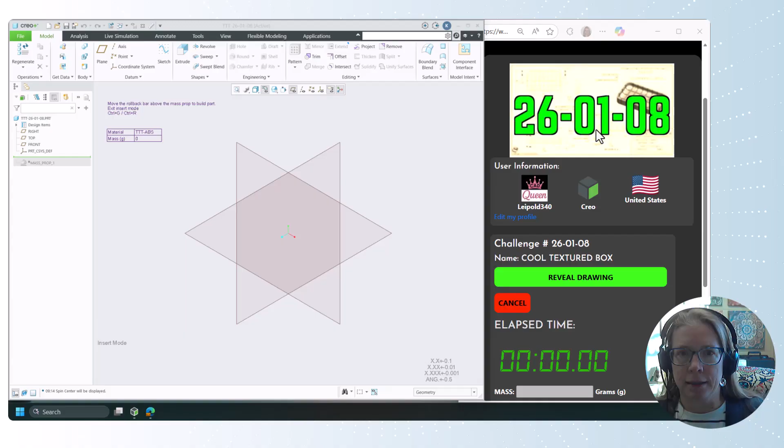And this one, we're jumping ahead into this year. We did this in the Monday model live, and I really enjoyed it. I learned something new, wanted to get it in video. And here we go. So we are in grams. This one will be ABS.

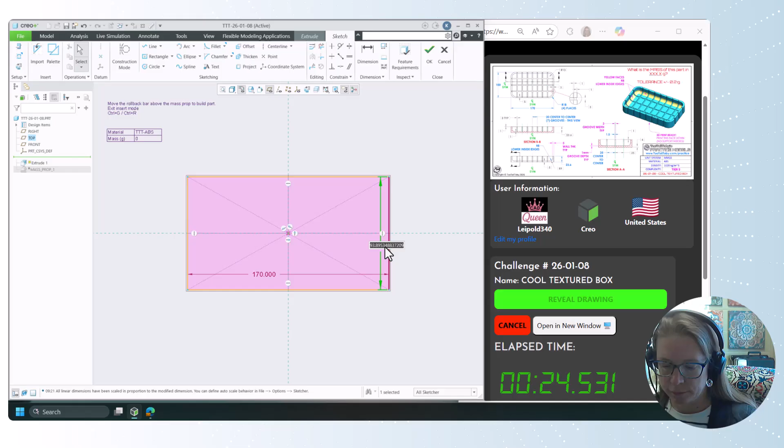So we're going to start with an extrude on the top plane. And we can add our rectangle. Let's do the center point rectangle. And we've got an overall width of 170, overall height of 100. And then let's grab this whole thing and throw some fillets on it. Okay. So that's going to have a round of 18.

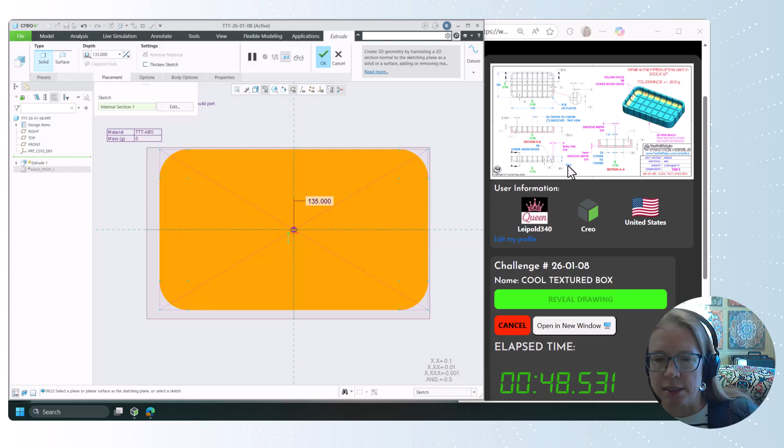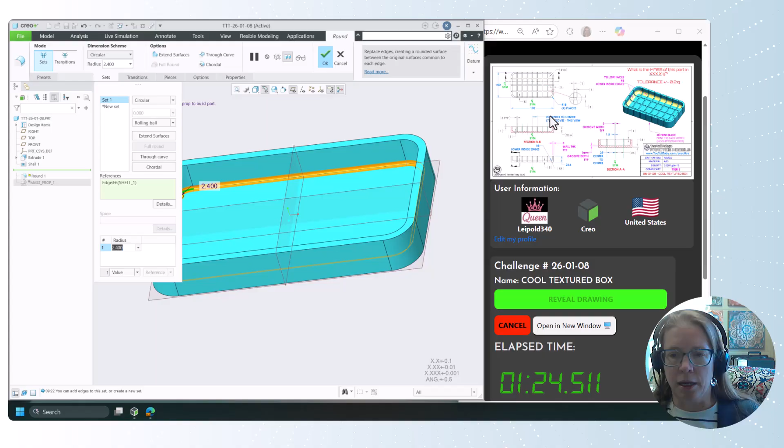Okay. And we'll extrude it the whole height of 23.6, I believe. I see it here. Oh, it's in the front view, not the section view. Okay, so we'll set the depth to 23.6. Okay, all of those edges are all a thickness of 5, so we'll add a shell with the top missing with a wall thickness of 5. And then drop the round in on the corners with a radius of, oh, where are you? 8. I wasn't looking for it to be in the 3D view.

Okay. So that's the bulk of the geometry, but we got to add all of these little cuts. So what we want to do is take an intersection between the full part. So items to intersect. I actually want to get the full body. And so hold down Control, the right plane. So that'll make this intersecting curve that goes through the body and the right plane. Okay. You kind of see it showing up there.

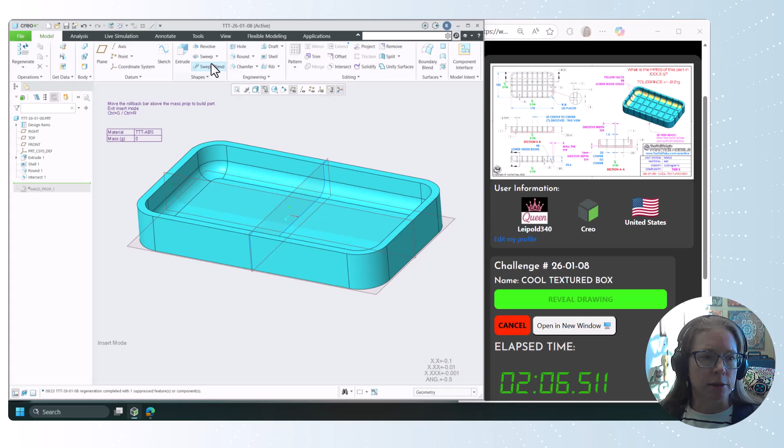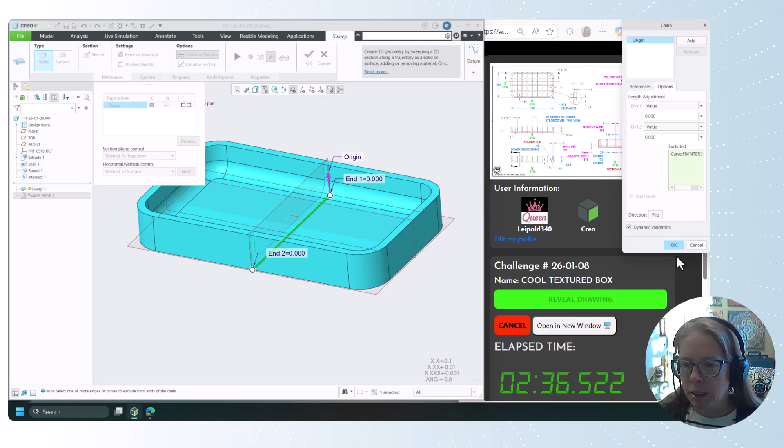All right. So now we're going to jump in and sweep. And the trajectory is this intersecting curve. You click on it, but I don't want the bottom piece of this curve. So we can go into the detail option, click on options, and for excluded, we're going to pick the bottom of the curve so that it only goes up and around. I'm going to flip the direction. Excluded. There we go. Okay, perfect.

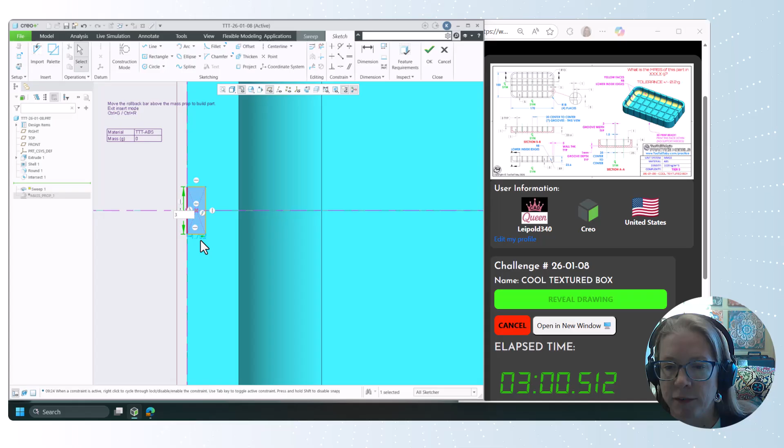In Sweep in Creo, if you're new to Creo, although being tier 5, I'm assuming most people have Creo experience. The cross-section for the sketch, you build right inside here. I really appreciate that. You don't have to create a separate sketch. So we got a width of 3 and a depth of 1. Okay, and we are going to remove material and follow all the way around. Beautiful. Control D, default view. There we go.

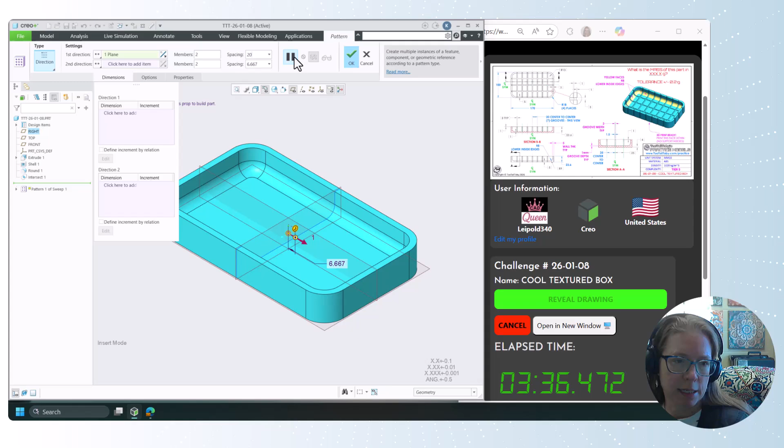Let's take that sweep and pattern it. We're going to go a direction pattern perpendicular to the right plane. So we're going to offset it. It says it's 20 center to center with 1, 2, 3, 4 grooves going to the right. With the direction pattern, I can have 2 directions, but that doesn't apply here. So what I found works is I can do this pattern, and then with the pattern still selected, I can click mirror over the top plane and get it going the other direction. Okay.

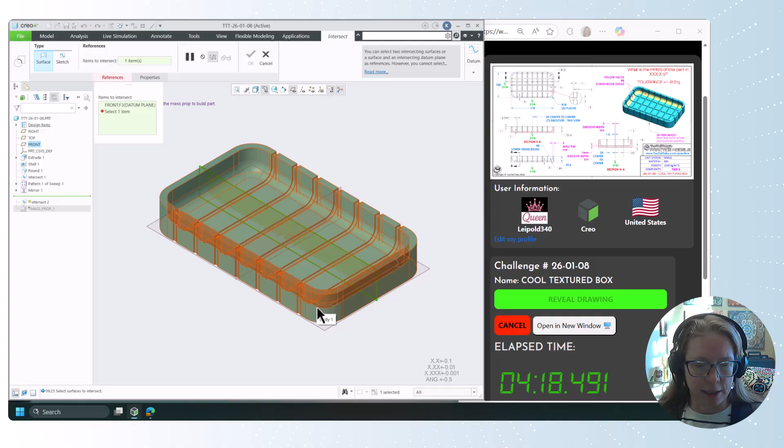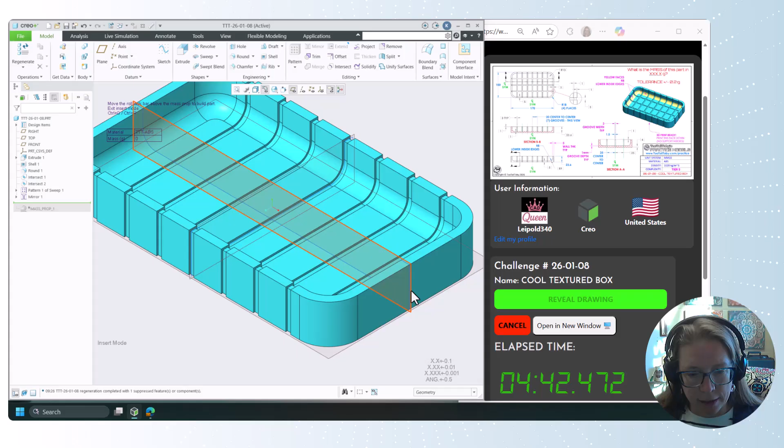This reminds me, actually I'll show you. We're going to do the same thing going the other direction. So we're going to intersect the front plane with the full body. So I'm right clicking until I get the whole body highlighted. I didn't hold down Control, shame on me. Hold down Control to get the front. And what you'll see here is this curve goes into all of those little slots. So we don't want that. Let's take the intersecting curve and go ahead of those cuts. So now we've got a nice smooth intersecting curve, and we'll do the same thing.

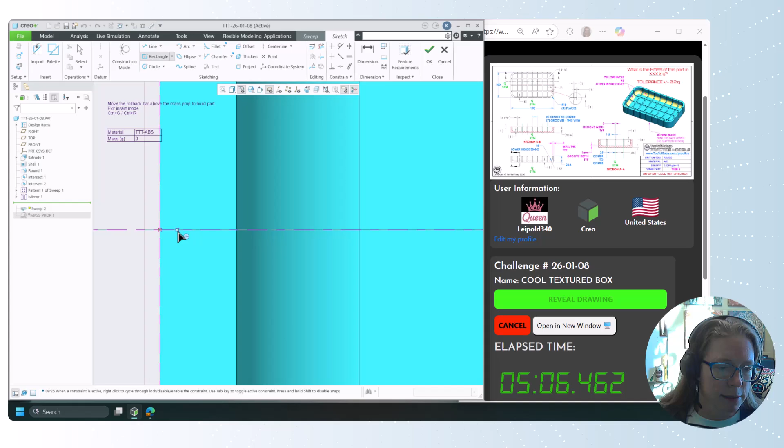We'll sweep using that curve in the details, options. We'll exclude the bottom piece of the curve. Now we've just got the top. Make the sketch. The rectangle is just here. 3 by 1. Make sure we're removing material. Okay. Right. And we'll do the same thing.

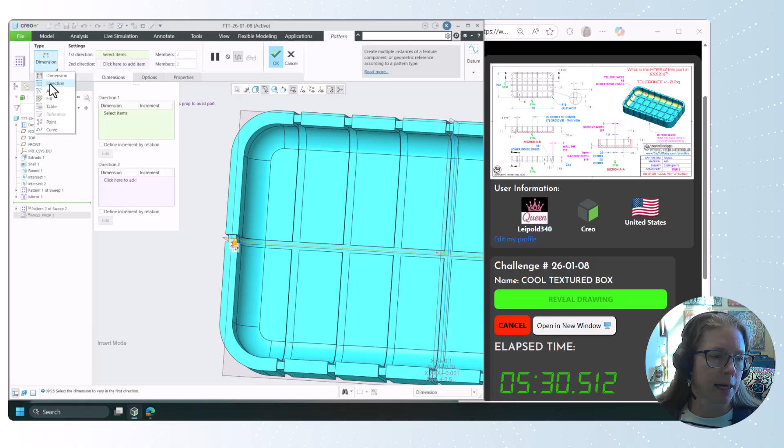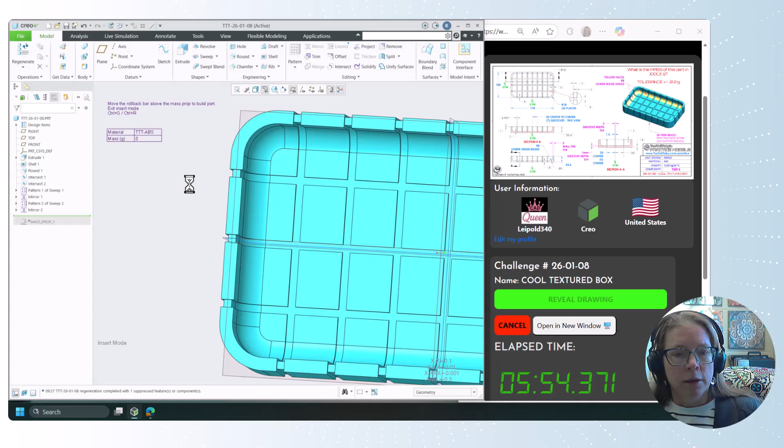We're going to take that sweep, pattern it with a direction pattern relative to the front plane. Here the spacing is 25 instead of 20. And we're going to have just 2. And we can take that and mirror it over the front plane. All right, so hide some planes, hide some tangent curves. I also want to hide some intersecting curves. And that is beautiful. All right, so let's see what our mass is.

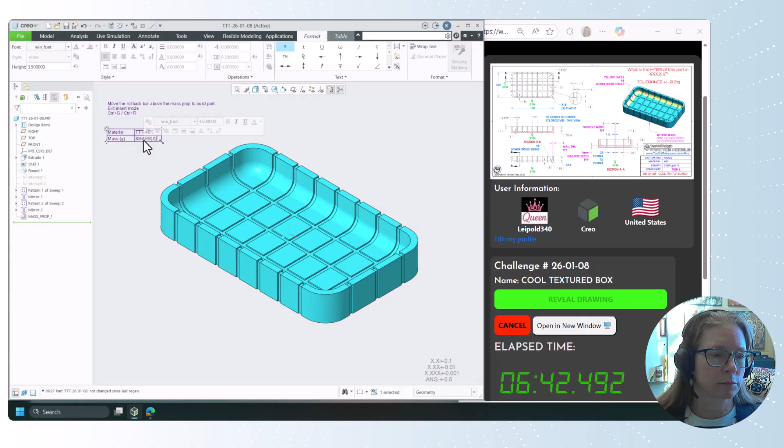133. We do want plus or minus 0.2 grams, so let's see if we can get another decimal place on that one. Hmm. Let's go. There we go. Finally got it to pop up. There we go. 132.8.

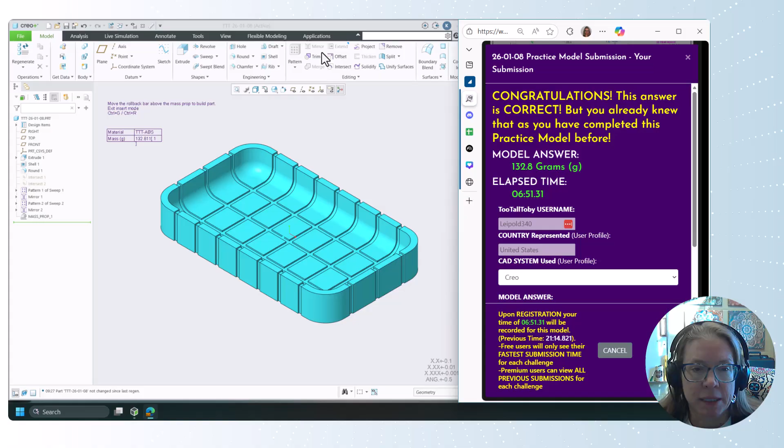Beautiful. So for me, I had not played with using the detailed option in the sweep trajectory to pull out that piece of that intersecting curve. I don't think I've used the intersecting curve in any of these models to date. It's been a minute since we've done some patterning and mirroring, but the intersection between the bodies and the plane to make the curve was really super helpful here. Additionally, being able to go into that sweep and remove that piece of the sketch was really important. And then the order of putting those cross sections in, so it wasn't going up and down with all of those ribs.